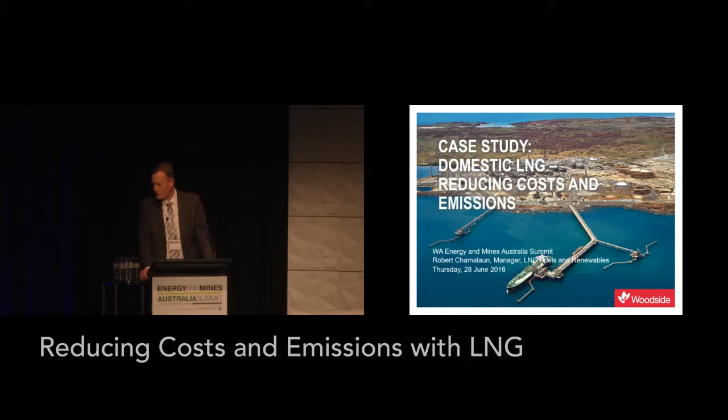My name is Robert Chamalaun, with a French accent there. I am the manager actually of the LNG fuels business here in Woodside from Perth, newly established business. And I'm fortunate enough to talk to you today about our domestic LNG trucking business and our renewable plans here in WA.

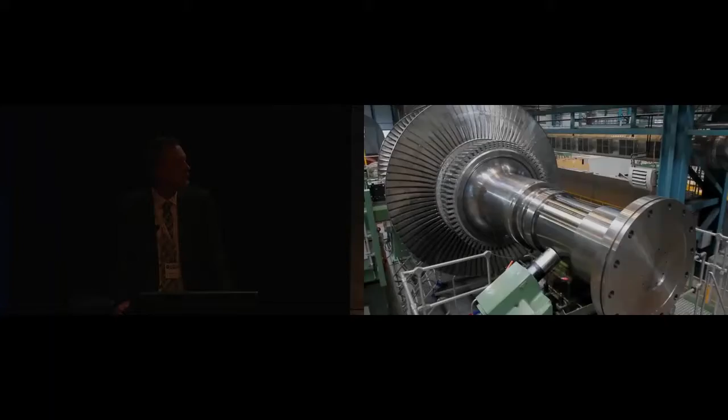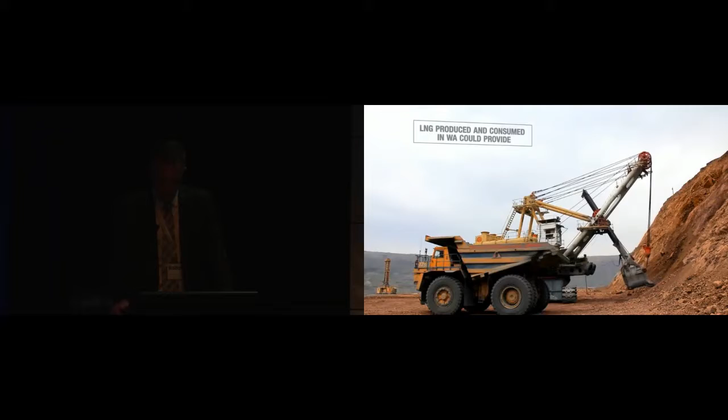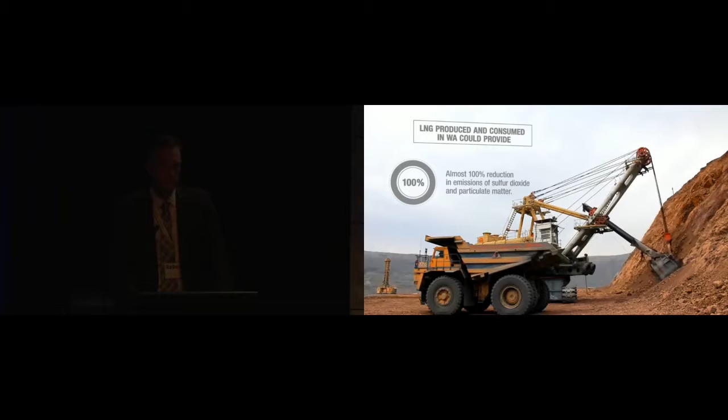More than 30 years ago, Woodside provided its first gas to customers in Western Australia. From there, it grew into worldwide sales of LNG. Now, we're pioneering cleaner power for the region where it all started, the Pilbara. The Pilbara produces more than half of the world's iron ore exports and is also home to world-class LNG processing facilities, including the Woodside-operated North West Shelf and Pluto projects. Powering the Pilbara takes a lot of fuel. Each year, 3 billion litres of diesel is imported into the region, primarily for mining, and the ships that carry the mining export product to market consume 5 billion litres of heavy fuel oil each year. Woodside is working to change this by providing end users with the opportunity to transition to LNG fueling from our Pilbara operations. LNG has long been used for power generation. Now, it's increasingly being used to fuel other sectors, such as heavy transport, like the types of trucks, trains and ships used by the mining industry. Environmental and health concerns are driving the world to cleaner fuels. LNG is the only cost-competitive fuel that can meet the power needs of such large vehicles, while also providing the lowest carbon emissions and pollutants of any conventional fuel. Compared to imported fuels, LNG produced and consumed in WA could reduce CO2 emissions by up to 30%, cut nitrogen oxides by up to 90%, and virtually eliminate emissions of sulfur dioxide and particulate matter. For these reasons, major equipment manufacturers have been investing in technology to use LNG, and it's now possible to buy LNG-fueled trucks, trains and ships. To enable the Pilbara to transition from diesel to LNG, Woodside is working with its Pluto LNG joint venture participants to build an LNG truck loadout facility. The facility will load LNG onto specialist tanker trucks for distribution. Scheduled to be completed in 2018, it will provide trucked LNG drawn directly from the existing world-scale LNG production and storage facilities at Pluto. The trucks will enter the Pluto site on a dedicated entry road, fill with LNG, and then deliver into the Pilbara and beyond.

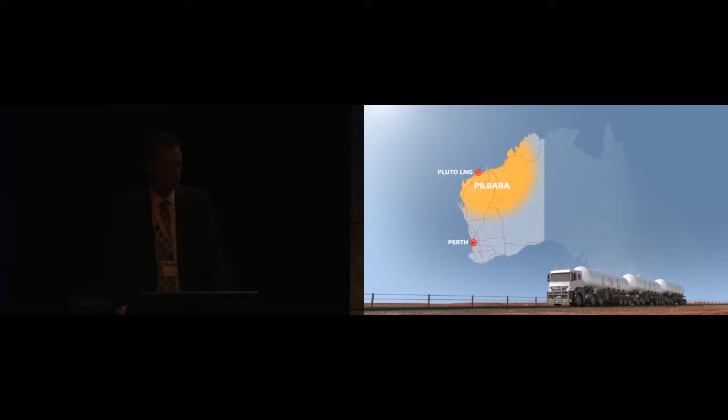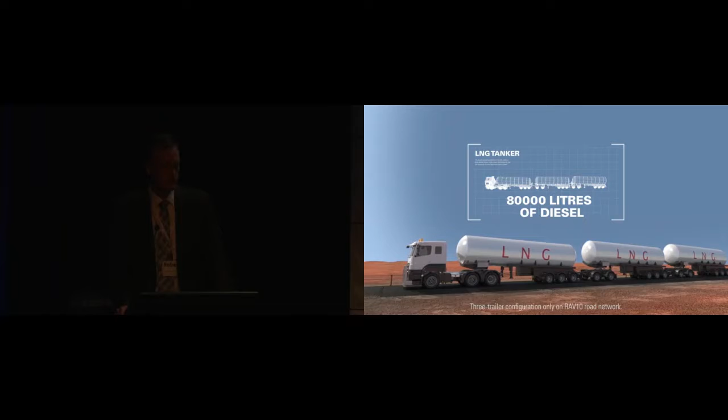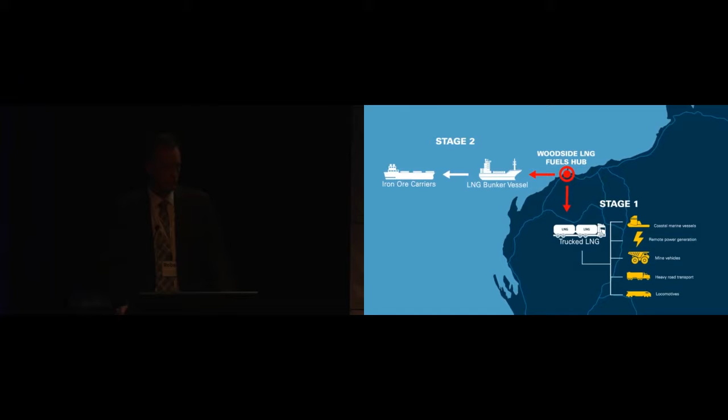LNG will be transported in highly engineered, double-walled stainless steel tankers. One road train will deliver LNG equivalent to more than 80,000 litres of diesel. Stage 2 of Woodside's LNG Fuels Hub is in the planning and feasibility phase and will include infrastructure to provide LNG fuel to large ocean-going ships such as iron ore carriers.

Woodside is collaborating to help make this transition possible by working closely with mining companies and equipment manufacturers. As the world increasingly turns to cleaner fuels, LNG is likely to become a fuel of choice. And nowhere else in the world does such an opportunity for LNG fueling exist. With large, reliable, export-scale LNG supplies coexisting with the Pilbara's energy-intensive operations, Woodside is committed to helping make this transition happen and supporting industry with a cleaner, local fuel to power the Pilbara.

That's on YouTube if you want to watch it again. Anybody? All right.

So the Pluto LNG nameplate capacity is around 4.9 million tonnes. That's an equivalent of around 7 billion litres of diesel capacity that it can displace if required. The truck loading facility will draw particularly from the Pluto liquefaction plant directly, as well as from the large storage tanks that exist on the plant, ensuring, which is the key point, unparalleled security of supply and peace of mind.

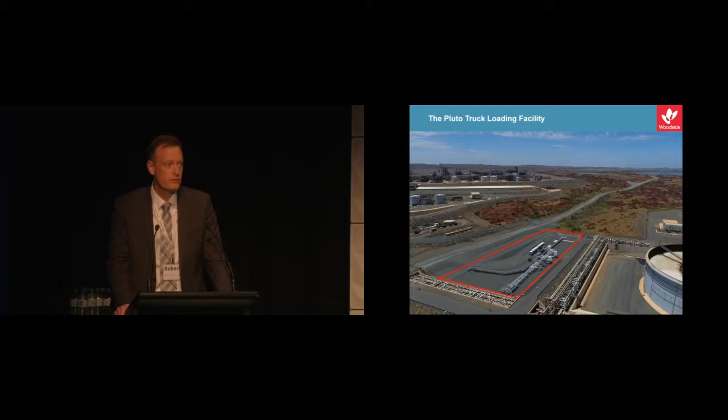It's designed for 24-hour operations with initial load-out capacity of around 100,000 tonnes per annum, but that's easily expandable, and we're already looking at that. This initial capacity is enough to displace around 150 million litres of diesel or power 100 megawatts of baseload power generation. Oops.

Look, there's nothing particularly novel about using LNG for power generation. You're probably aware that EDL do that now for Horizon for a number of the remote communities up north in Broome and the like. But with the Pluto truck loading facility, we'll open up another option for domestic LNG power generation for miners and communities in the Pilbara and beyond. The cost and reliability benefits of drawing from our world-scale plant will make this a more compelling case than ever before. Woodside is also seeking other potential users for power.

Mining equipment's high horsepower and 24-hour operations is where LNG most makes sense. Whilst battery power will make sense for small private vehicles, it doesn't make sense for the large vehicles. Current battery technology cannot be readily transferred to them. For example, the half-tonne of batteries in a Tesla Model S car would only power a haul-pack truck for under 2 minutes. A battery big enough to last a whole mining shift would weigh nearly 200 tonnes. Heavy transport will still need the energy density of liquid fuels like LNG or diesel for decades to come, and equipment manufacturers are adapting their offerings accordingly.

In particular, Caterpillar have reached full commercial availability of an LNG option for the 785 mine truck, and it can be retrofitted at the moment to an existing unit. It's as simple as going to your Cat dealer and buying one. Gas trains is even more advanced.

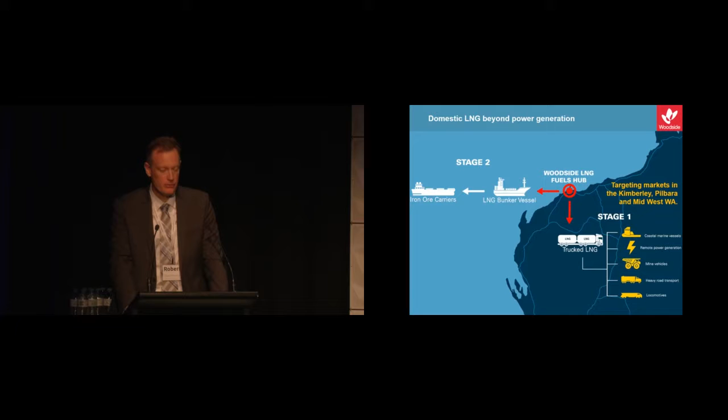The Siem Thiima is Australia's first LNG fuel ship and one of the first in the Southern Hemisphere. Taking goods out to Woodside's platforms, it has completed 40 successful LNG fuelling operations, displacing an equivalent of 1.5 million litres of diesel already. Operational benefits have been realised, with fuel cost savings and materially reduced operating costs. Environmental benefits have also been captured, with 25% reduction in emissions of carbon dioxide, over 90% reduction of sulphur dioxide and particulate matter, and reduced nitrogen dioxide.

Most importantly though, there are health benefits, with our offshore personnel relaying direct accounts of reduced noise and particulate emissions on the platform when the Siem Thiima is stationed at the platforms. These are the same benefits that remote communities and mining workforces are seeking and will experience when organisations adopt LNG and renewables.

LNG is a key part in the new energy paradigm for remote power generation. We believe LNG and natural gas has always been touted as the natural complement to renewables. So coupled with that, battery technologies, grid technologies, we are today able to offer a suite of solutions and address both cost and emission issues to deliver customers a viable, levelised cost of electricity at competitive pricing.

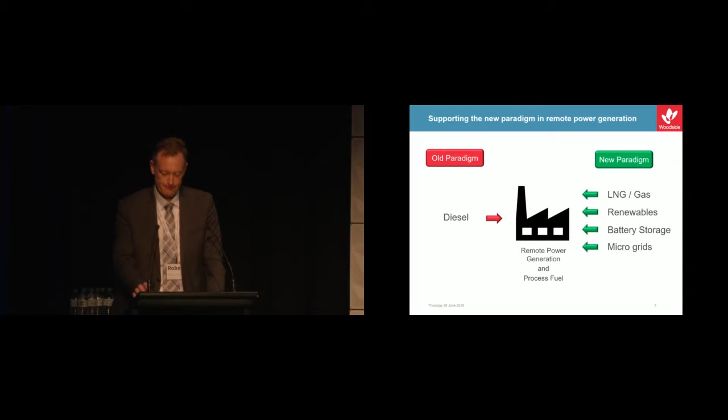At today's oil prices, we can deliver domestic LNG to remote mine sites at a 20 to 30% discount to diesel to most locations within about 1,200 to 1,500 kilometres to the Pluto plant. And we're working with a number of you in the room already to demonstrate just that.

As each mine or community has different needs, pricing discussions need to reflect specifics around the transportation logistics, storage requirements, and the mine life timeframes. We are working on adapting the on-site storage and regasification to better cater for short-term mine lives as well as long-term baseload requirements.

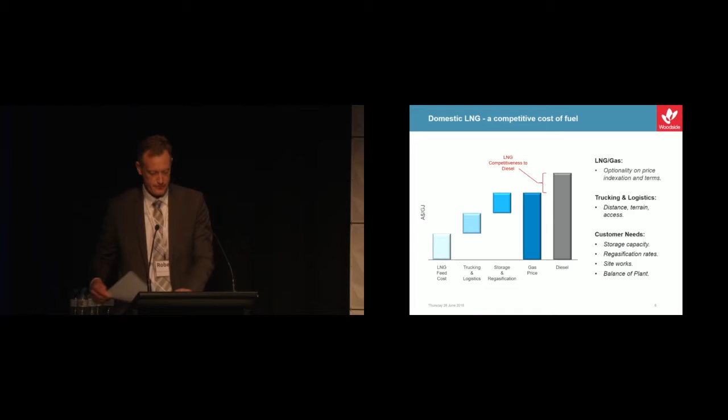There's been a lot of conjecture, I guess, around life cycle emissions, and so Woodside went off and commissioned a report for the life cycle emission analysis, which was completed by a company called Energetics and independently peer-reviewed. It compared the life cycle emissions for power generation, specifically using Pluto LNG, versus diesel out to some remote mine sites, and we varied whether it be a 200 or 900 kilometre distance to travel.

Bottom line is that by the time the LNG passes the burner tip, LNG provides a life cycle reduction of 27% in greenhouse gas emissions compared to diesel, near elimination of sulphur and particulate emissions, and a significant reduction in nitrous oxides. As we have found with the Siem Thiima, it is a very clean fuel and provides a material emissions reduction.

While solar alone can provide emission reductions coupled with diesel, there's still 75% plus of the greenhouse gas emissions associated with diesel alone. However, when solar is combined with LNG, you can nearly eliminate the pollutants, the impact on the workforce, and provide the largest greenhouse reductions that is currently feasible.

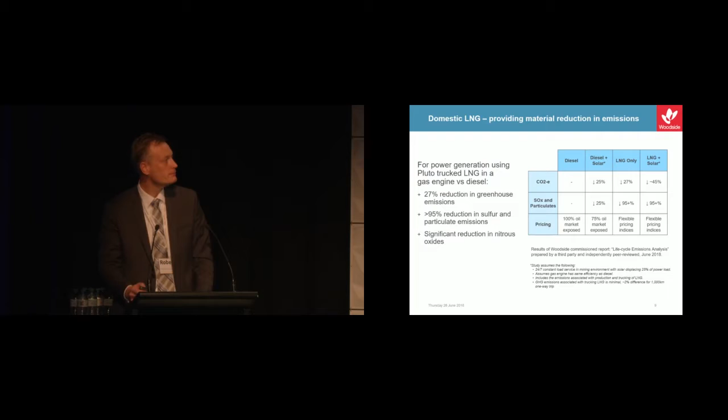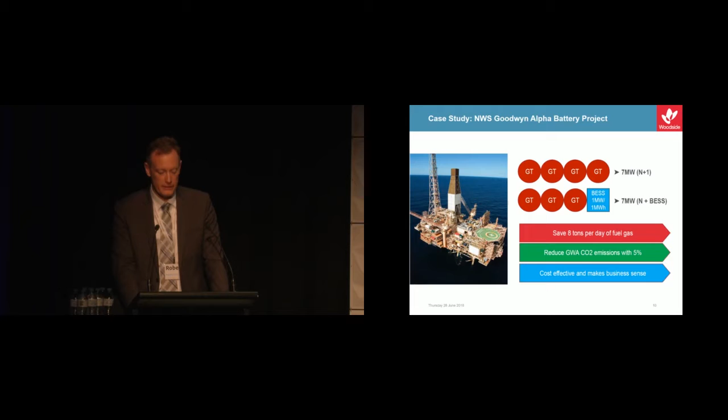Renewables are not the only way to reduce emissions. We've heard that a number of times already in the last day or so. Woodside has also achieved emission reductions and operating cost reductions through the application of innovative storage technologies on the Goodwyn offshore platform, which can also be readily applied to power generation at remote mine sites and has been shown by other organisations at this conference. My colleague will talk further later on today.

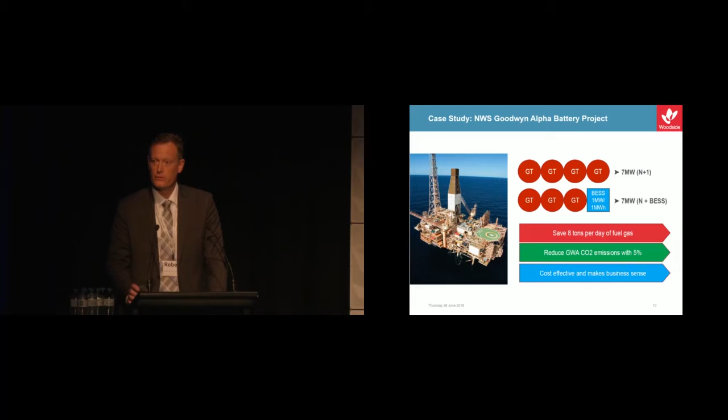So, in closing, I took the liberty of actually grabbing some themes from yesterday. I had originally just had the 2 or 3 dot points to summarise, but I thought it was more prominent to refer to the themes I had coming out of yesterday and how that relates to domestic LNG.

The first one, security of supply. Clearly the number one issue from yesterday. I like to think that domestic LNG from the Pluto plant is hugely reliable. The Pluto LNG plant has an extensive storage capacity, and I would say ensures unsurpassed levels of energy security to the industry out there.

Cost. Delivered energy is not only price competitive to diesel, we can deliver it at the cheaper price, but it's the ongoing operating and cost savings which I think will also be quite astronomical to the industry as a whole. Sustainability. Gas is undoubtedly a natural complement to renewables, only further enhancing the emission reductions and sustainability of remote power generation, and it provides even greater health benefits to the remote communities.

Price volatility was mentioned. I thought that was an interesting theme, but I guess a lot of people who rely on diesel rely on the market. Well, I guess what we're trying to offer is price flexibility arrangements. We can have different indexes, and the domestic LNG can provide protection against exposure to oil price and FX movements as well.